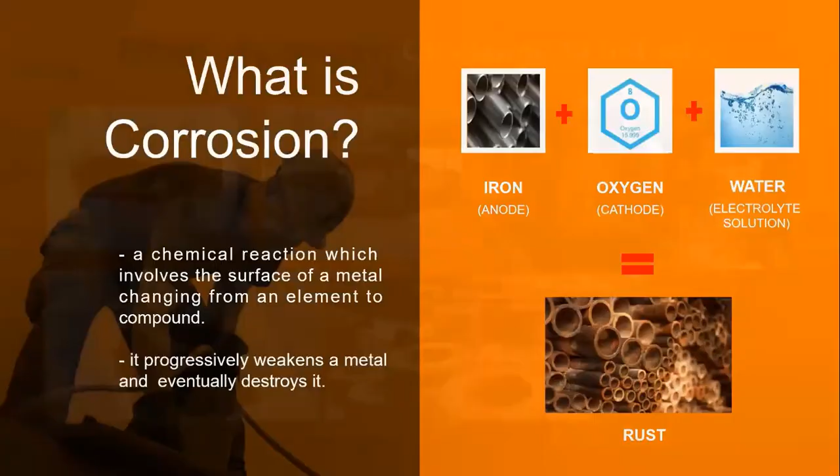This kind of reaction, when it spreads and worsens, greatly affects the industry. It has always been a huge challenge how to prevent and handle this situation, because our concern isn't just the appearance - that it looks unsightly when rusted - but also the safety, health, and environmental effects, the cost, and the possible shutdown of the company if we fail to address this corrosion problem. So let us look closer at the effects of corrosion on the industry.

Here are images that most of you are probably familiar with, or have already encountered such rusting in your plant. On the first image, upper left part of the screen, we can see a corroded flange. Neglecting the rusting can cause the flange to leak.

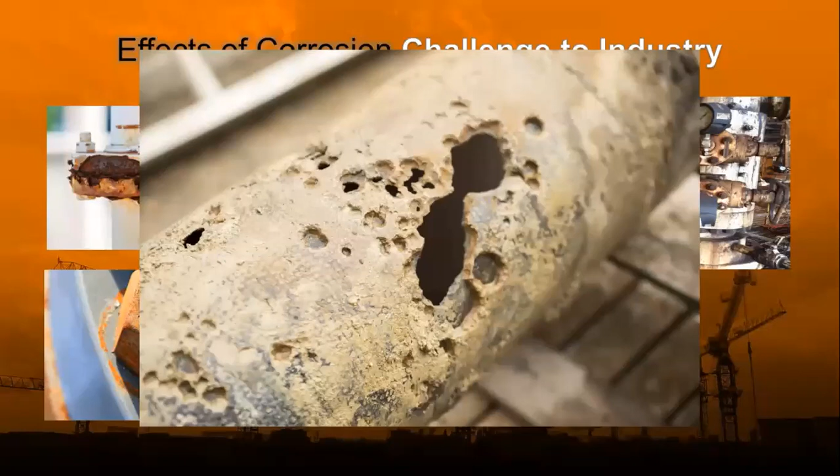The flange can go through two types of corrosion: pitting and crevice. Pitting corrosion causes small cavities or pits on the surface of the material - this is an example of pitting corrosion. Crevice corrosion can be very damaging because it is not easy to inspect, since it occurs in confined spaces like this. So that's an example of pitting and crevice corrosion.

As we are all aware, when a flange is damaged, it is no longer sealable by a gasket and needs to be either replaced or repaired.

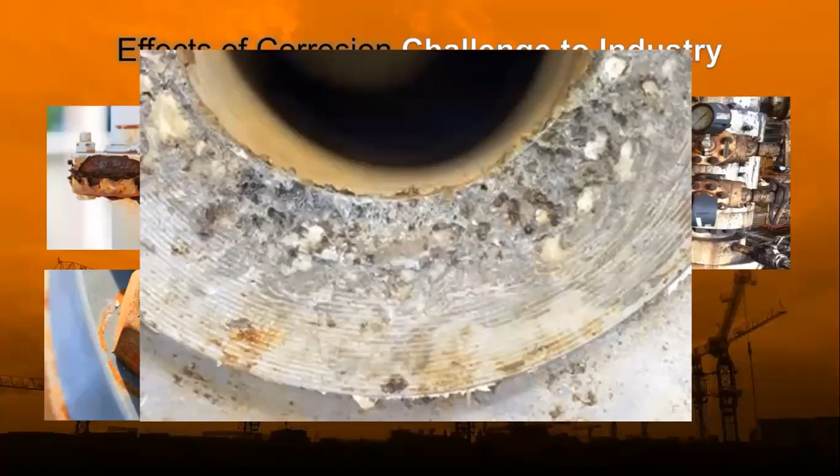We also have corroded wellheads. Coastal and offshore applications rust more easily because they are exposed to salt water. Imagine the maintenance requirements of such an asset - the cost of blasting, and paint will not be that effective on such complex structures. Painting would also be difficult due to the high humidity.

And then we also have fastener corrosion, lower left part of the screen, that can cause loss of mechanical integrity, fatigue, loss of surrounding clamp materials, and stress corrosion or embrittlement.

Then on the last image, as an example, we can see stored assemblies. But because they've been stored for too long, instead of being used in the future, it's wasted since they can no longer be used because they've already corroded. And the company didn't just lose the asset but also wasted material.

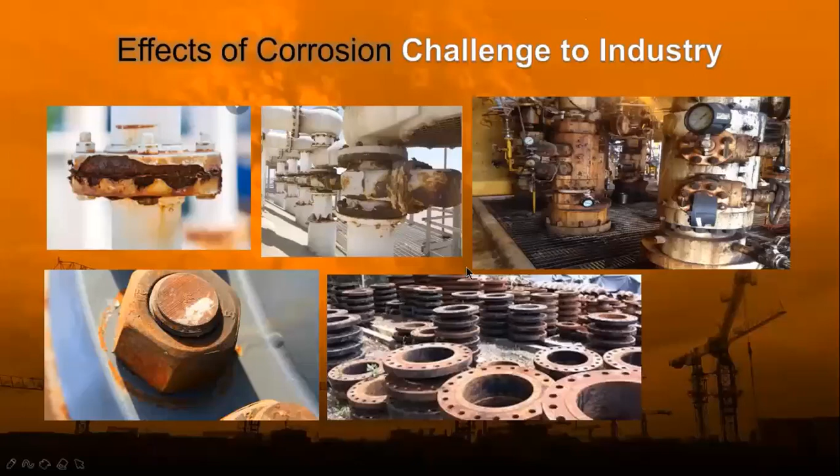To enumerate the financial impact of corrosion, let us proceed to the next slide. First is the cost of labor attributed to corrosion management activities. Of course, that exists, and the cost is bigger when the coverage of the corroded asset is bigger.

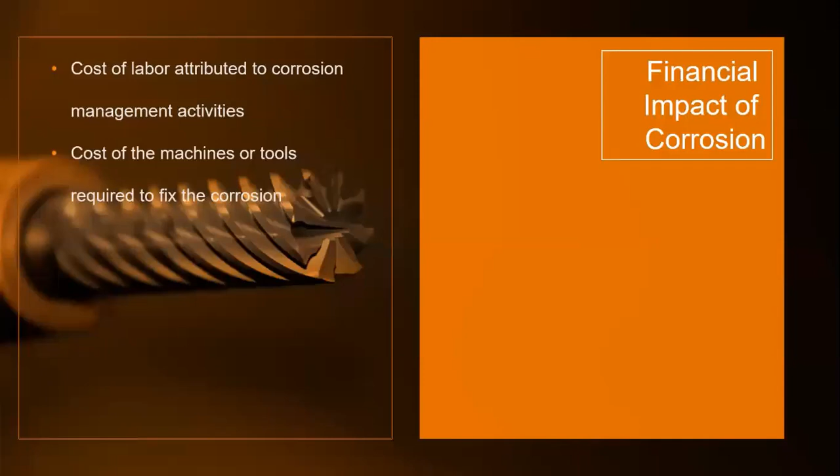Then, the value of the machines or tools needed to fix the corrosion. And if the affected equipment is unrepairable, the needed cost to replace that equipment. And if the power plant needs to stop production to fix the problem, we have something called loss of revenue. Then lastly, cost of loss of reliability.

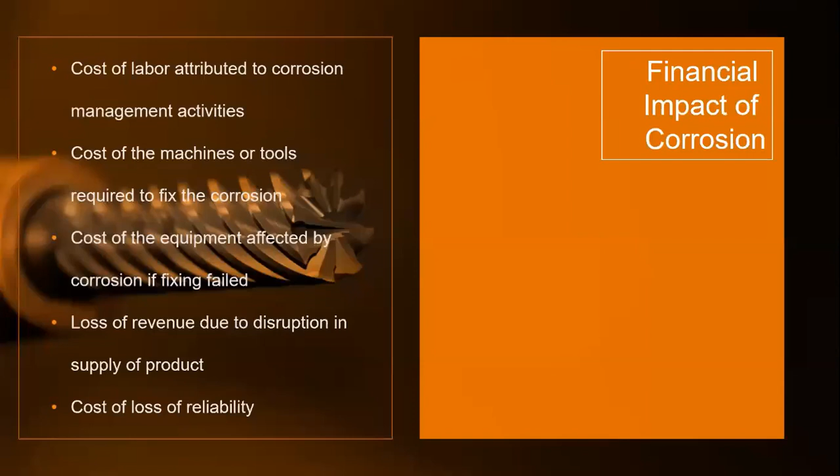When you sum up all these costs, imagine all the losses. Also imagine what if we could prevent or stop the worsening of the corrosion problem - how much would we save? That is why we want to introduce our surface-tolerant corrosion solution, especially for complex asset integrity challenges.

So introducing our solution - introducing Oxifree. The origin of our solution was established in 2009, with head office located in Frimley, a town in England. Our solution is a thermoplastic coating - from a solid resin, it is melted using a machine we will show later, and that same machine is used to apply our thermoplastic coating onto equipment. This solution is designed to provide a simple solution to complex corrosion problems.

To give you an overview, let us watch this short video.

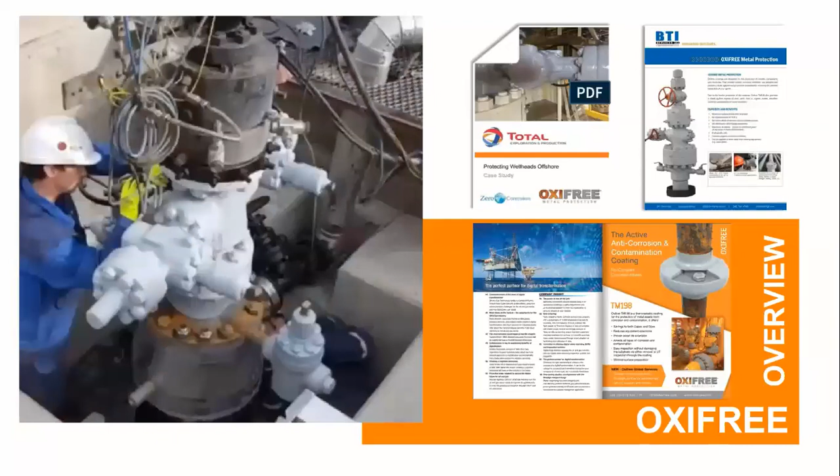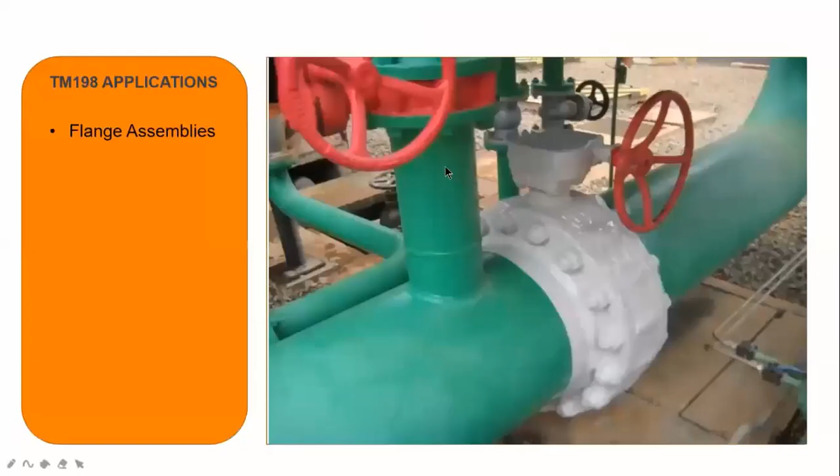And going back, our solution provides global corrosion protection to metal assets - not just in one country, but globally.

Now let's learn which applications this thermoplastic coating, Oxifree, can be used for. First, flange assemblies. As you can remember earlier, I showed an image of a corroded flange. Using our solution, we can prevent possible leakage, not just on one flange, but all the flanges you want to apply Oxifree to.

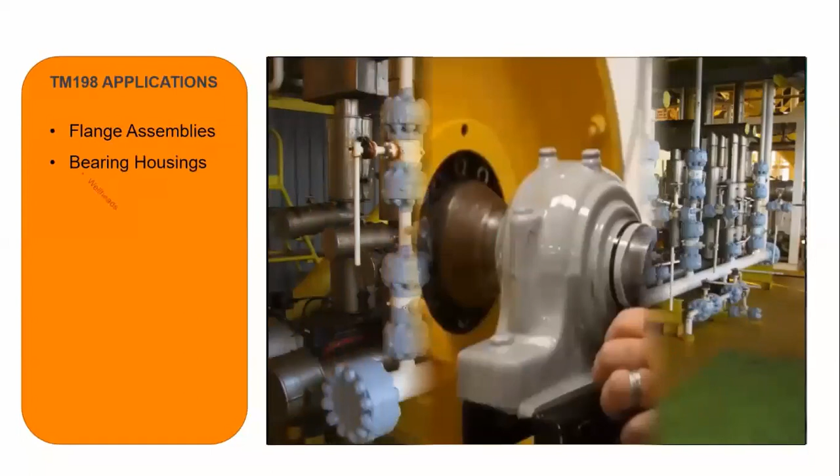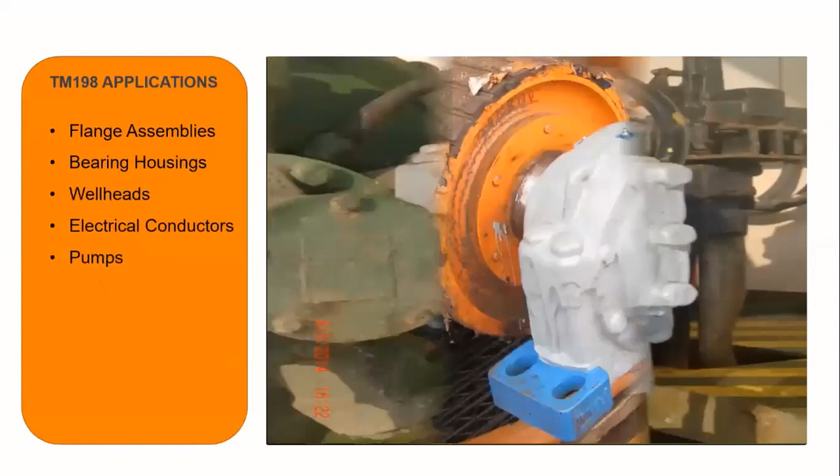It can also be applied to bearing housings, well heads, electrical conductors, pumps, gearboxes, Lokring connectors, valves, and stored assemblies.

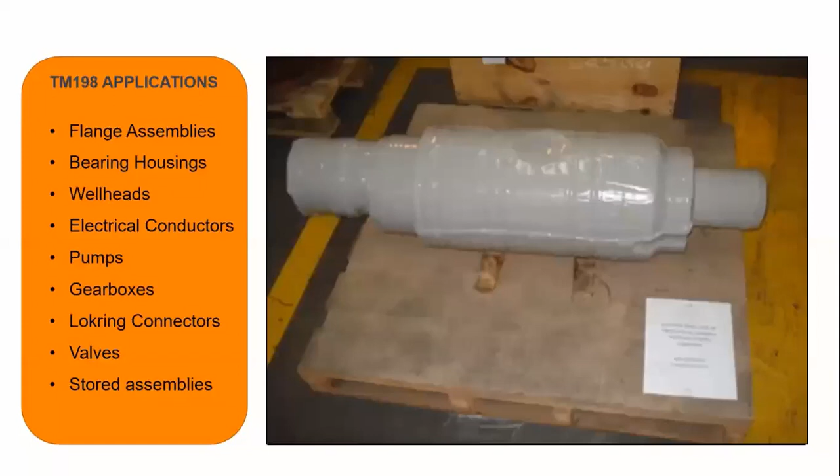So let us learn further what the solution can do and what the competitive edge of our solution is. We call our solution Oxifree. What are the competitive edges of Oxifree? We have asset integrity, health safety and environmental, credibility, practicality, and cost efficiency. And of course we will prove each one of these competitive edges.

First, asset integrity. Oxifree possesses asset integrity quality because with our thermoplastic coating, your asset will have the capacity to run effectively and accurately while also protecting the well-being of all personnel and equipment with which it interacts. Proving this further, the asset is protected rather than potentially compromised.

Unlike just using paint, we are not aware that our equipment is already compromised, because behind that paint, pitting corrosion is forming. But with Oxifree, this solution not just seals from external contaminants, but also has a built-in corrosion inhibitor. So it's a two-in-one protection.

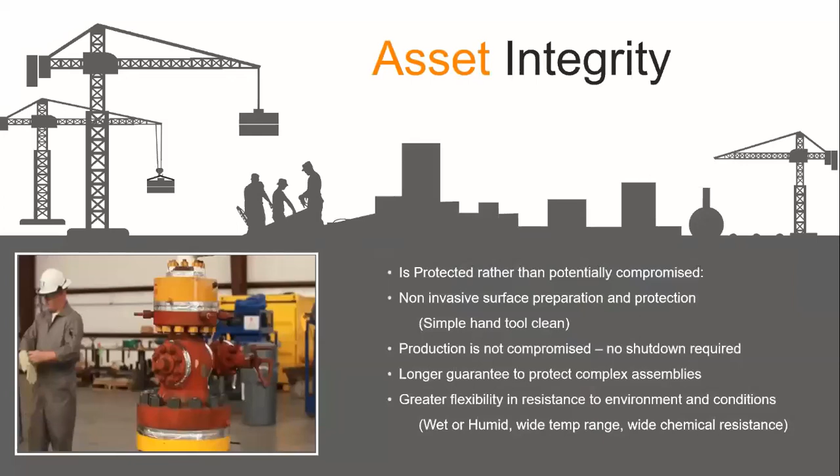For surface preparation, unlike paint or other traditional solutions which need a lot of preparation, with Oxifree only St3 type of preparation is needed, or what we know as wire brushing. We can apply Oxifree without the need for shutdown, because you can apply it even without removing the equipment from its place.

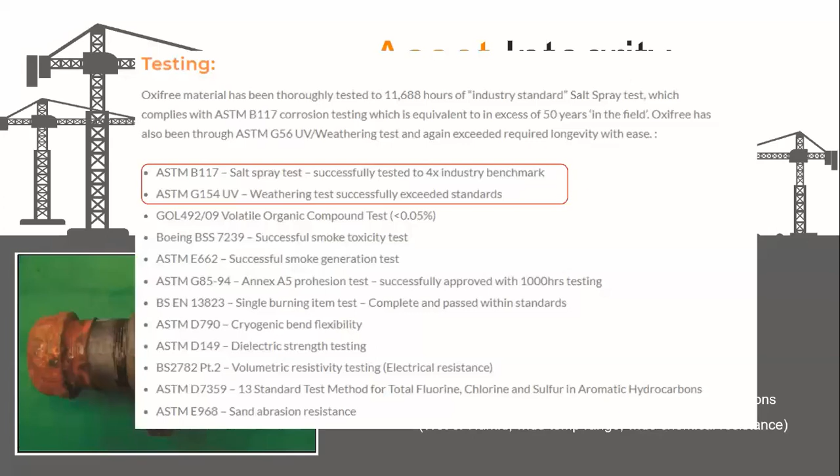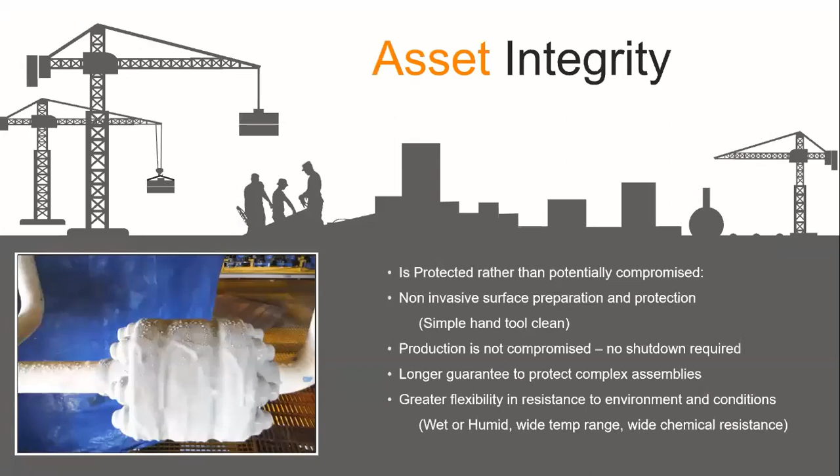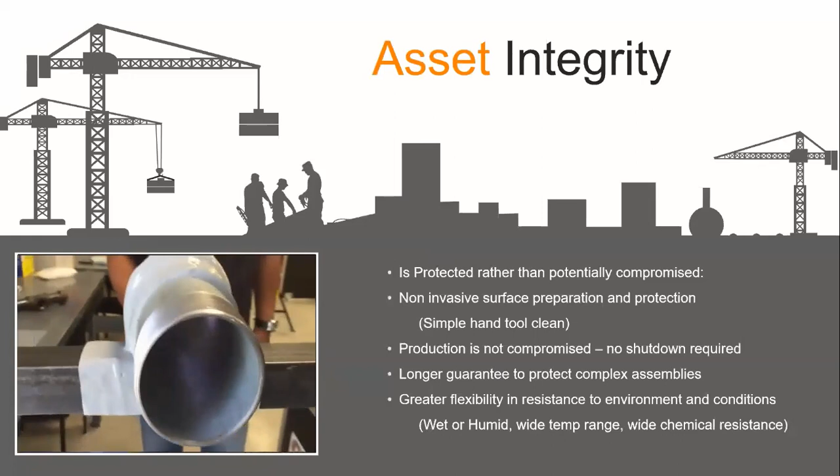Oxifree also expands and contracts without crazing or cracking. It has greater flexibility even when exposed to vibration, and it can also withstand ultraviolet rays, passing the ASTM G154 UV test with excellent results. As you can see in the video, exposure to vibration still shows no crazing or cracking because of its greater flexibility.

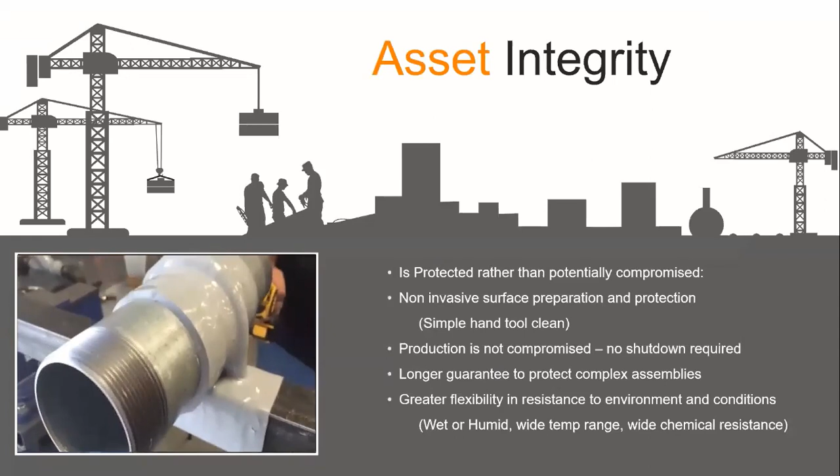The next quality is health, safety, and environmental - non-hazardous and no environmental impact. When a material has low VOC, it means it is not harmful to the environment and even to people. Oxifree has undergone the GOL 492/09 volatile organic compound test and shows that it has very, very low, almost zero, VOC.

Oxifree is also successful in the smoke toxicity test and smoke generation test, meaning it's not flammable and won't auto-ignite when exposed to high temperature.

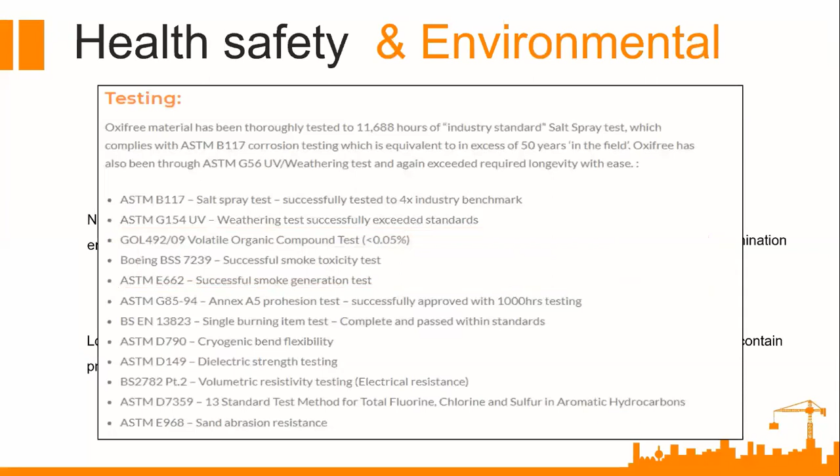So no worksite contamination, and why? It has no solvent content and excellent UV resistance. It's reusable during application, so no waste. And even if you do not want to reuse the coating when the material is soiled or contaminated, it can be landfilled or incinerated - still not hazardous to land or aquatic life.

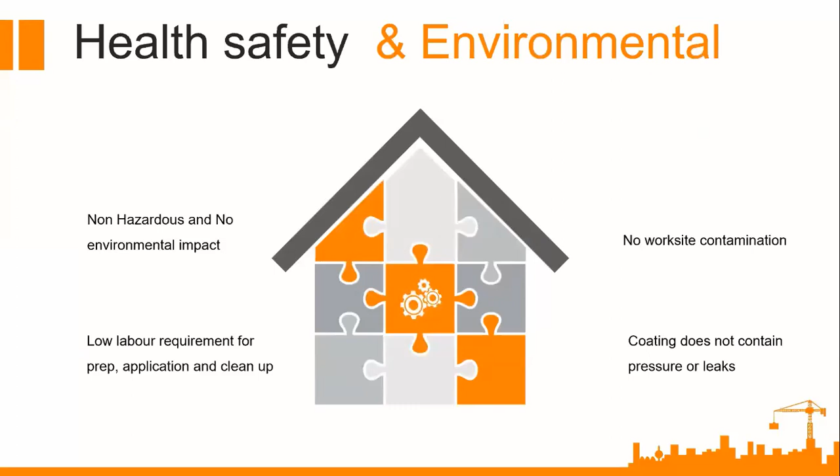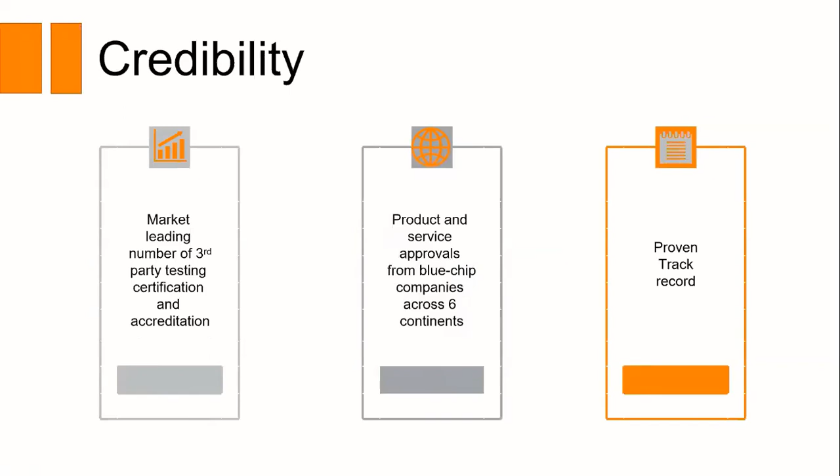Next is credibility. Oxifree is approved for its market-leading number of third-party testing certifications and accreditations. What we have shown you earlier is just some of the many tests Oxifree has undergone and passed accreditation for, meaning the product complies with specific standards for safety, quality, and performance.

It also has product and service approvals from blue chip companies across 6 continents, and a proven track record, which we'll show you later.

The last quality of Oxifree is its practicality and cost efficiency. Once applied, Oxifree dries quickly - you just have to wait about 5 minutes. It's also reusable and produces no waste.

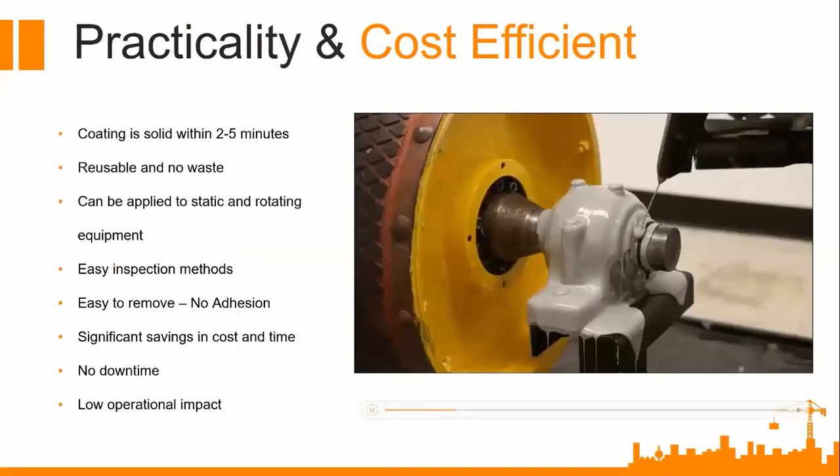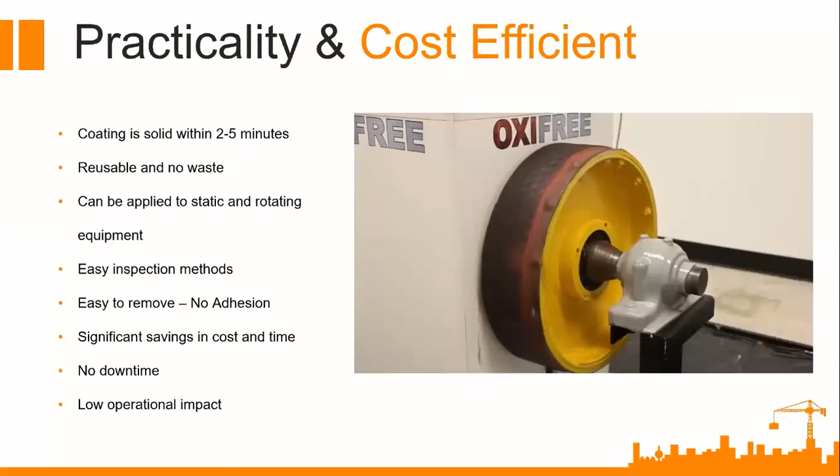It can be applied to static and rotating equipment, as you can see in the video, so the rotation of the asset is not compromised. And also, easy inspection methods, whether digital or visual.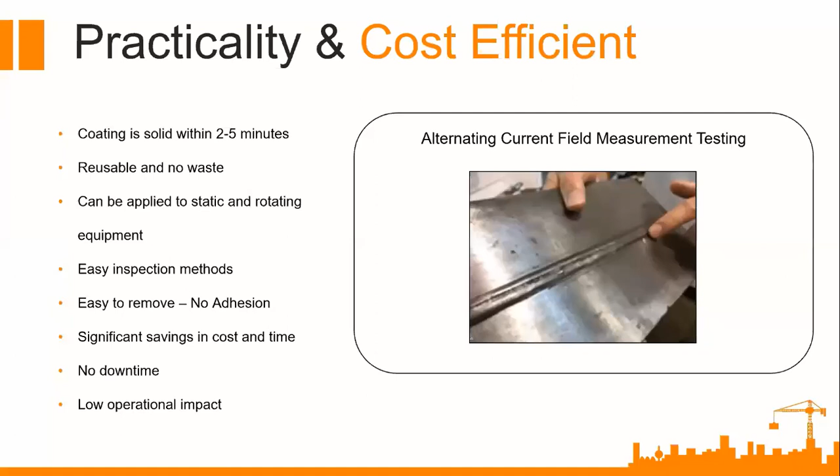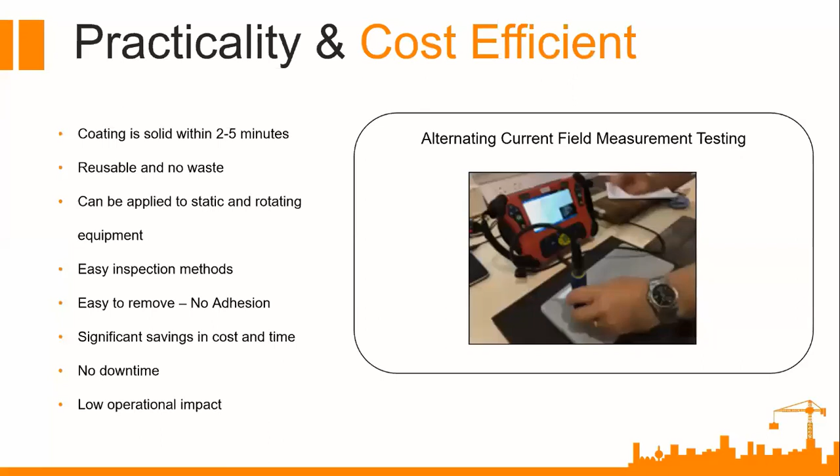For example, we have the alternating current field measurement testing. First shown is a steel test plate with a cracked weld seam. TM198 is applied to the steel plate before alternating current field measurement testing, which has the ability to identify anomalies through TM198 for field inspection of coated welds. The results were perfect, maintaining the ability to identify and size the cracks.

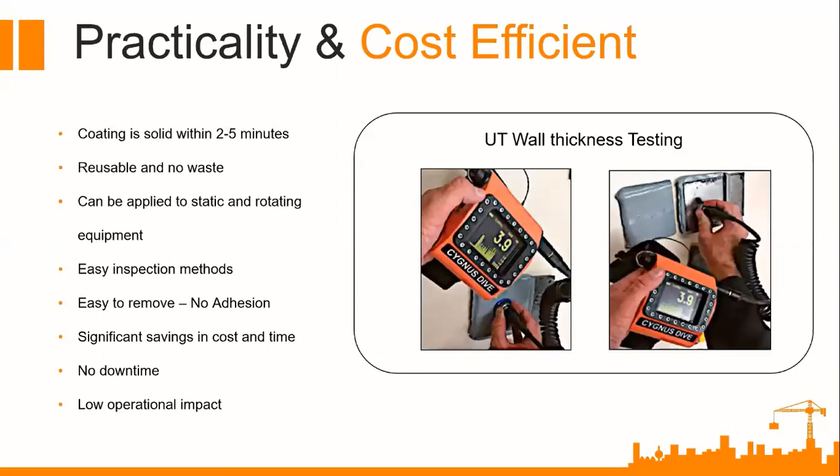Another test is the UT wall thickness testing. TM198 is applied to a 4mm steel plate. The coating does not impede the ability to inspect wall thickness - as you can see, after removing the coating, it's still the same measurement. The handheld multiple echo UT thickness gauge is proven to measure the remaining metal thickness.

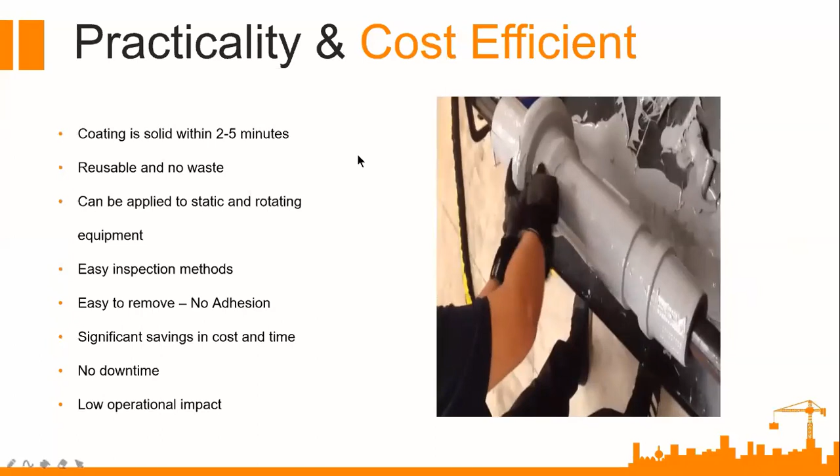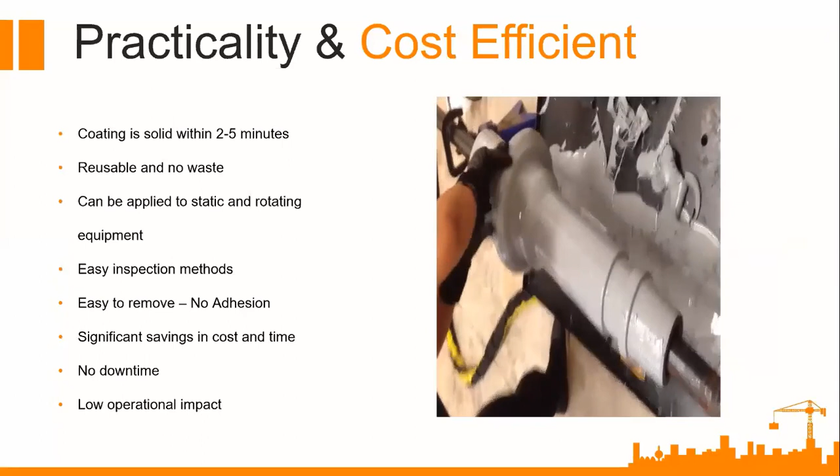OxyFree is also easy to remove, with no adhesion because of its non-bonding technology, so it can be easily removed. OxyFree also saves cost and time, with no downtime and low operational impact.

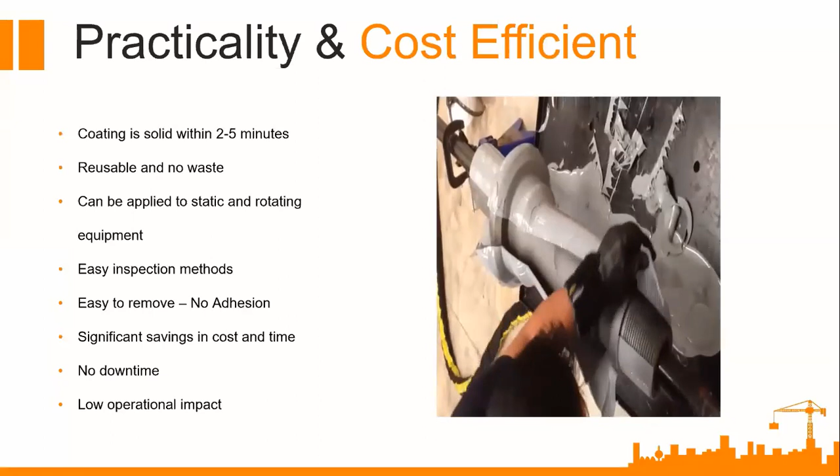So how do we apply Oxifree to our complex assets? We use applicator machines, and we have four types of machine used depending on the equipment being applied to.

So we have the Polymelt SG1, lightweight handheld. Used for inspection or repair of damaged coating. These are the characteristics: supplied in a sealed hard case for maximum durability. Standby mode ensures the applicator is not at maximum temperature when not in use, so it has a standby mode. And it has interchangeable nozzles for specific applications.

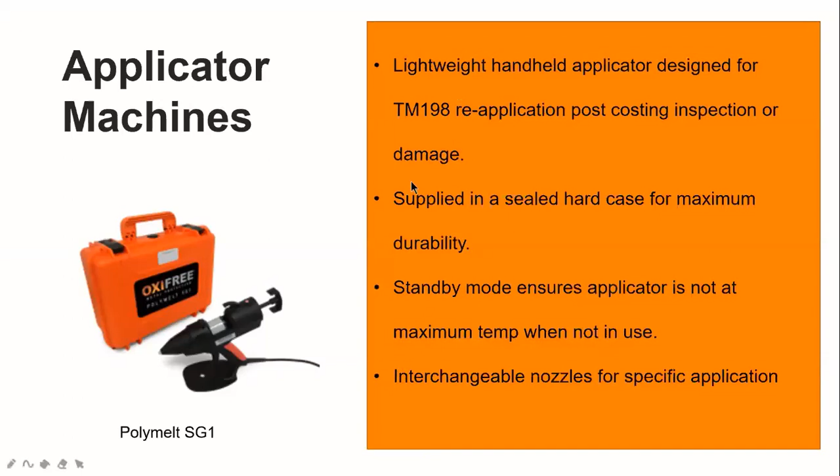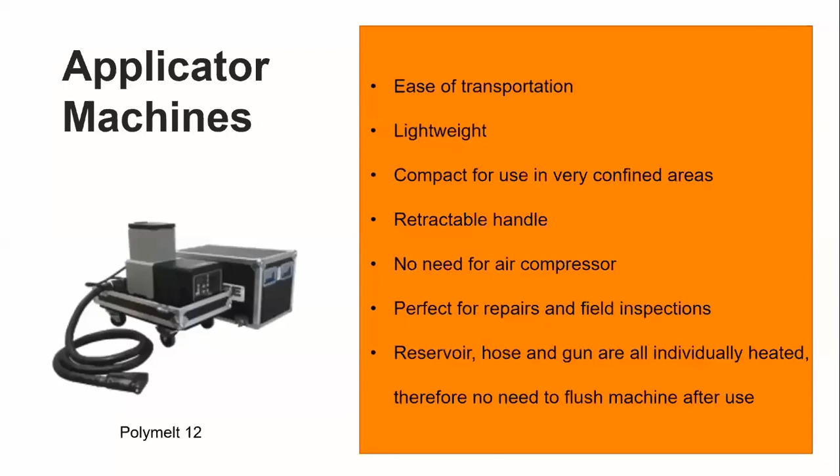We also have the Polymelt 12. Ease of transportation because it has wheels, you just push it along, and it's lightweight too. Compact for use in very confined areas. Retractable handle, no need for air compressor. Perfect for repairs and field inspections. Reservoir, hose, and gun are all individually heated, therefore no need to flush the machine after use.

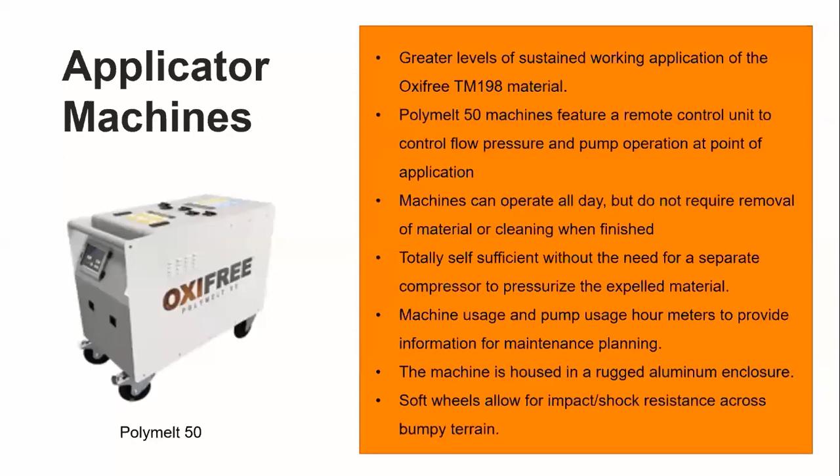We also have the Polymelt 50, used for greater levels of sustained working application of the Oxifree TM198 material. Works in ATEX, IECEx environments. The Polymelt 50 features a remote control unit to control flow pressure and pump operation at the point of application. We will give advice on which applicator machine is best to use on your particular asset. So we also have the Polymelt 50 for hazardous environments.

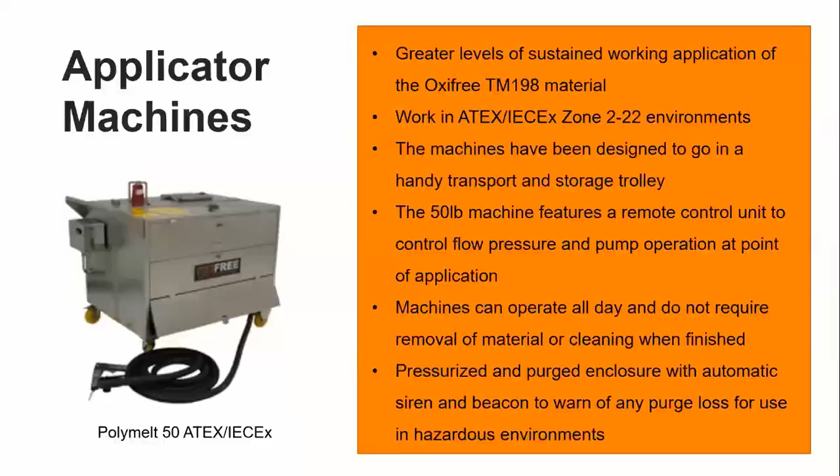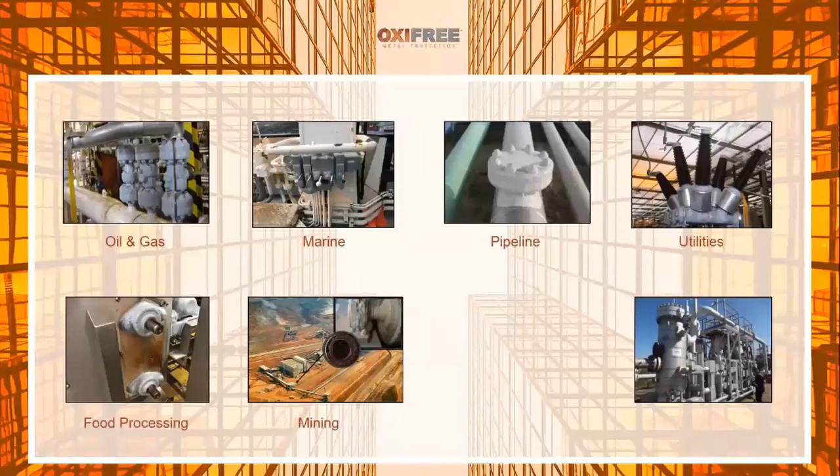Now I will share with you some of the applications and projects of Oxifree around the world. Oxifree can be used in a lot of industries: oil and gas, marine, pipeline, utilities, food processing, mining, storage, power production.

So this is an example of an Oxifree project: wellhead preservation at Chevron, Thailand. They applied Oxifree to 15 wellheads and covered them in just 2 weeks, so the efficiency was 3 times compared to other technology. What the client wanted was no need to shut down, and we cannot blast the substrate.

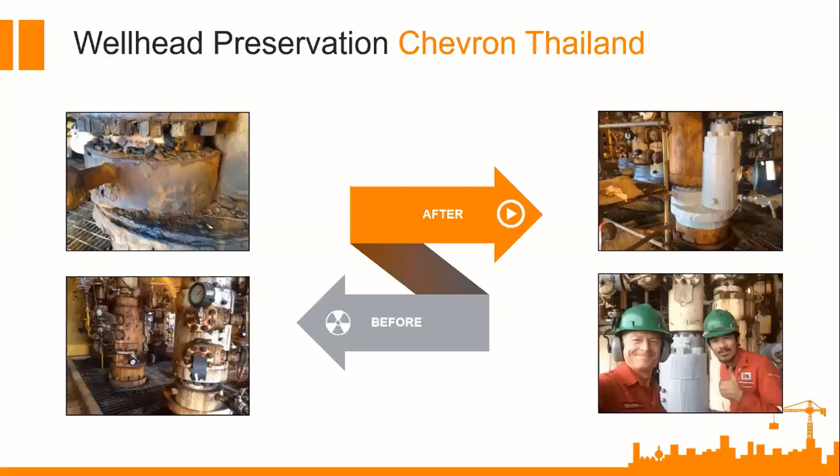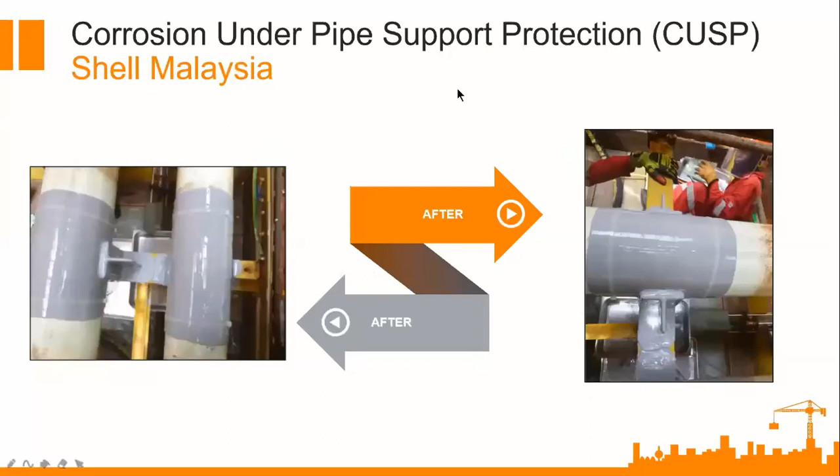So an average of 45 to 55 flanges were coated per day, making this a very cost-effective operation, at least 5 times the efficiency of other coatings. So what we have shown you are just some of the many projects of Oxifree around the world.

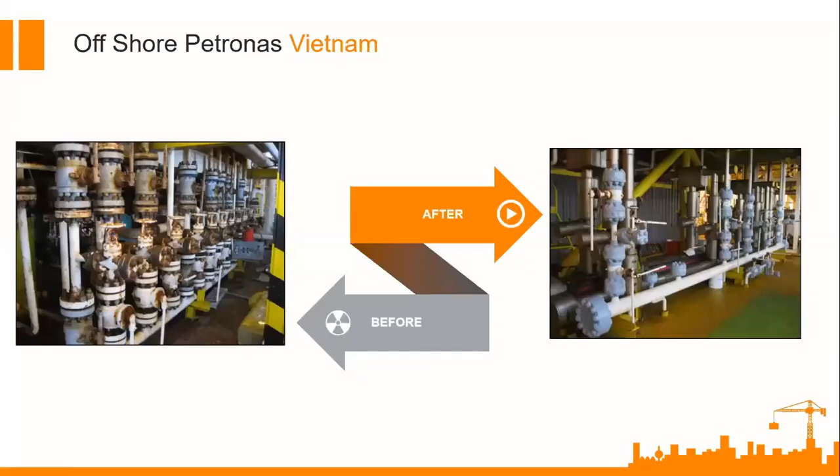If you want to learn more or to see more examples of Oxifree projects, you can visit our site, just go to hytecpower.net. We will provide the link on the chat box, and then you can select industrial division. You can explore our website to see more of our products.

And under the maintenance platform, you can see the non-bonding technology, corrosion protection, and then you can choose Oxifree surface solution. And then we also have the frequently asked questions.

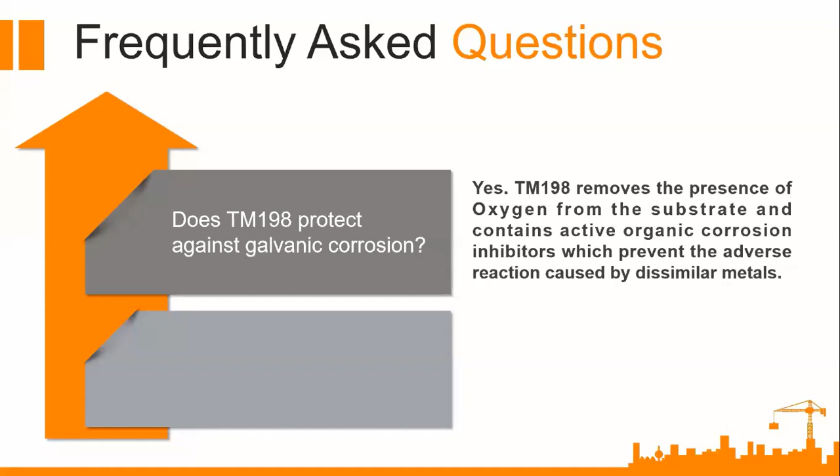Does the TM198 protect against galvanic corrosion? Yes, it removes the presence of oxygen from the substrate and contains active organic corrosion inhibitors, which prevent the adverse reaction caused by dissimilar metals.

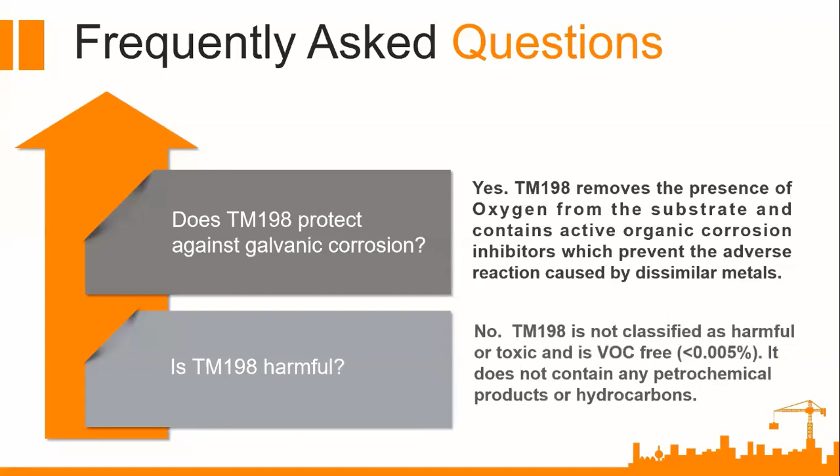Is the TM198 harmful? No, because it is classified as non-toxic and is VOC-free. It does not contain any petrochemical products or hydrocarbons.

How is TM198 packed? It comes in rectangular blocks of solid resin, which are supplied in either a sealed box or plastic containers, depending upon the final destination and market.

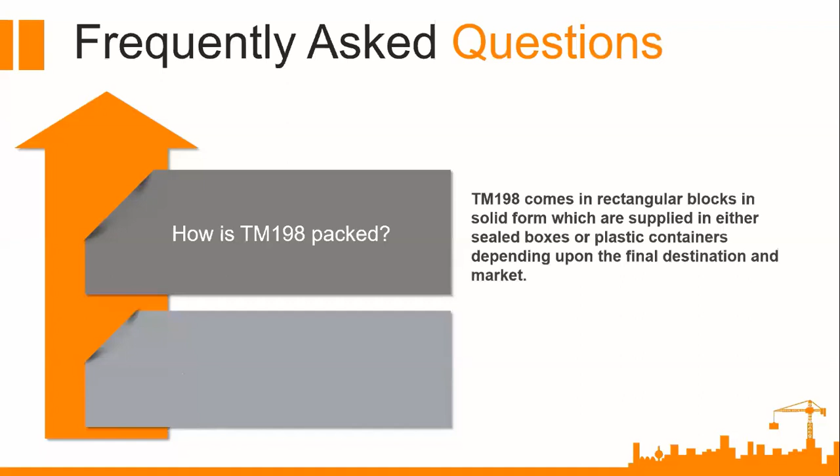What is the area coverage consumption of Oxifree? 3.9 kilograms per square meter at 4 millimeters thickness. And of course, as part of our free services, we will have a plant survey and inspection.

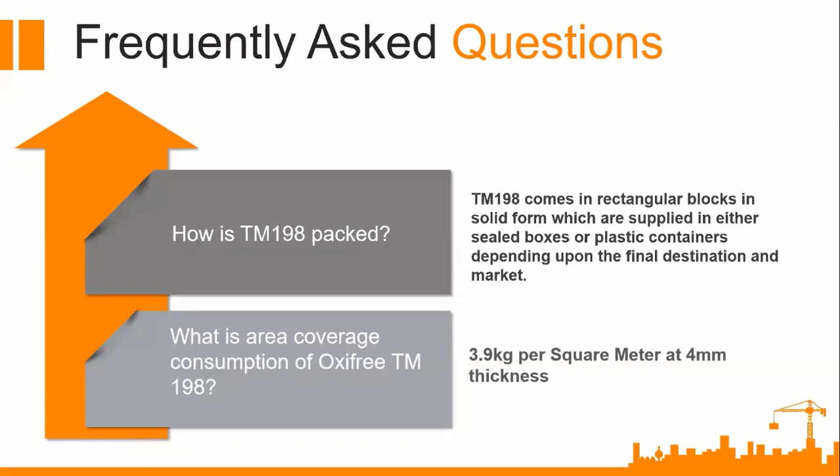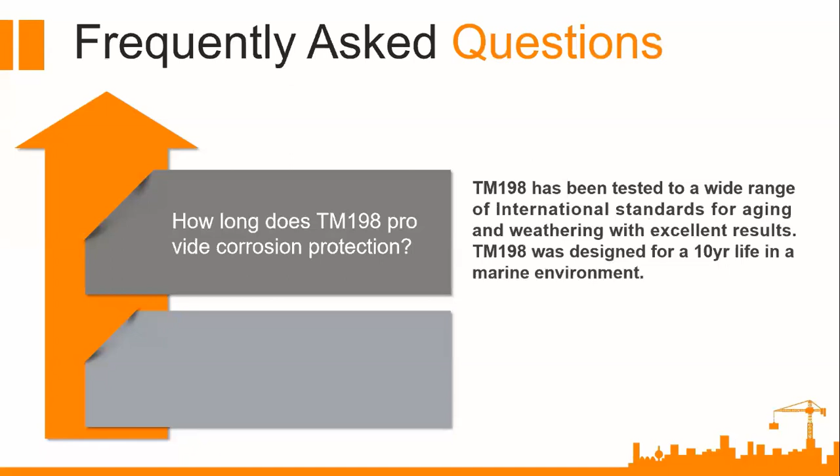How long does TM198 provide corrosion protection? As mentioned earlier, it has been tested to a wide range of international standards for aging and weathering with excellent results, and it was designed for a minimum of 10-year life in a marine environment.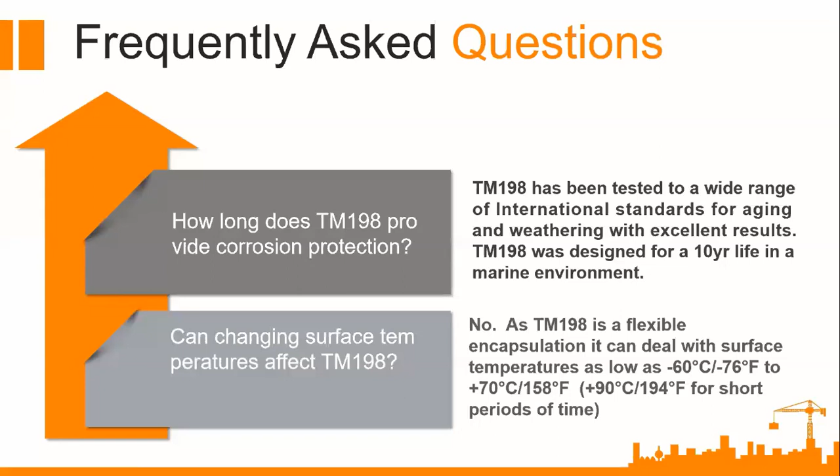Can changing surface temperature affect TM198? TM198 is a flexible encapsulation, so it can deal with surface temperatures as low as negative 60 degrees Celsius to 70 degrees Celsius.

Before we proceed to question and answer, I want to leave this quote: it is literally true that you can succeed best and quickest by helping others to succeed.

That is why at Hytec Power, we don't just provide or promote our product, but we also have a lot of free services. We provide optimization survey services, free consultation from experts, and product demonstration. We can do product demonstration at your power plants. And of course, we have after-sales training, product maintenance, repair and reconditioning, and also technical support.